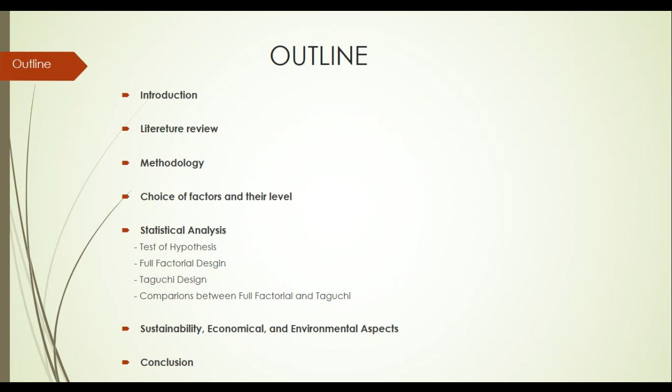I would like to go through the outline of the presentation. I will introduce the topic, quickly touch on the literature we reviewed to see the background of the problem, and share our methodology to tackle the assumptions we had. We will also discuss the factors we landed on and their levels, and explain the statistical analysis we used to come up with the conclusions of our research. We will touch quickly on the sustainability, economical and environmental aspects of the suggested process, and by the end we will conclude with some conclusions from this research.

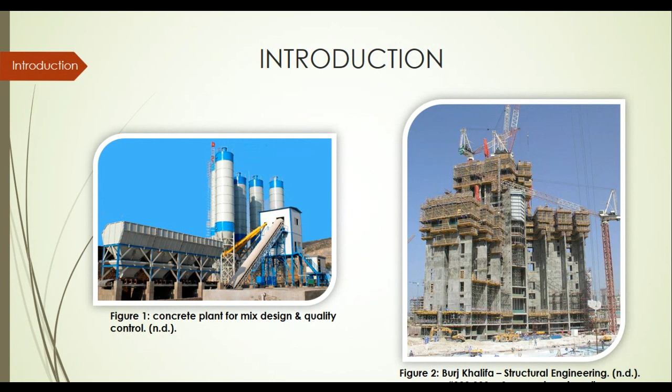In general, concrete and construction industry is a viable and advancing industry, especially here in the United Arab Emirates, where a lot of construction is moving on. As an example, Burj Khalifa Tower has consumed almost more than 330,000 cubic meters of concrete volume. So basically, the concrete and construction industry requires a lot of attention and improvements to save the environment and reduce the cost as well.

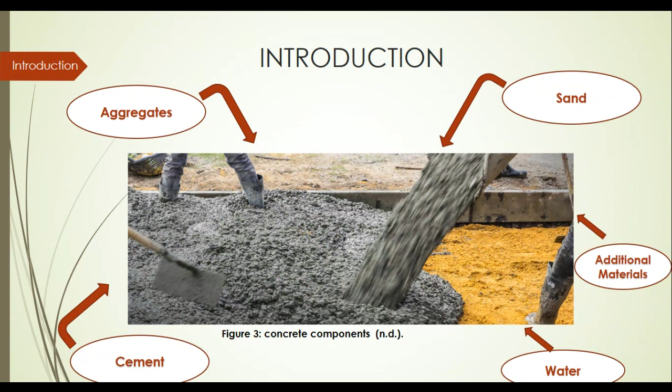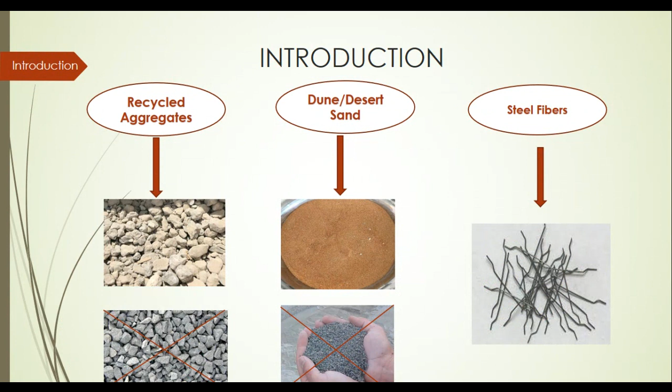In general, concrete is made of aggregates, cement, sand, water, and some additional materials to give the concrete certain properties. What we are suggesting here, and would like to improve in the concrete mixing process, is to add recycled aggregates as well as dune, which is desert sand that's available for free here in the country. We would also like to examine and test the addition of steel fibers in the concrete mixing.

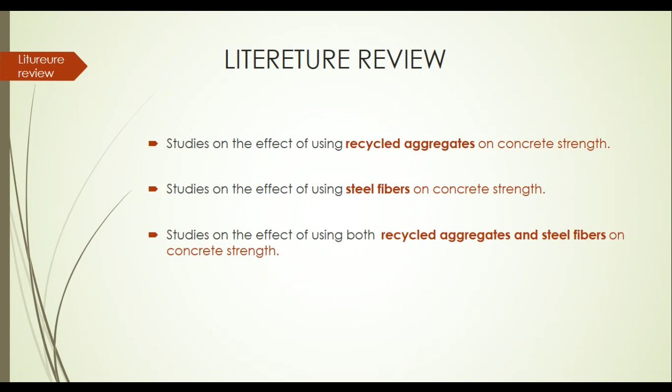Before we get into the experimentation, we did a literature review on the topic to see what has been done regarding adding recycled aggregates and regarding adding steel fibers. But honestly, the dune sand or desert sand is something we are suggesting here in the paper, so not much literature was found on addition of the sand.

Just going through the literature review regarding the recycled aggregate and its effect on strength: here we have a couple of research studies that verified and tested the addition of recycled aggregates. For example, Cakir et al. in 2012 found that 100% of recycled aggregate decreased the compressive strength by 24% of the compressive stress of the samples.

Yehia et al. 2015 concluded that 30% of recycled aggregate will not do much change to the compressive strength. Zhou and Chen, 2017, said any percentage more than 50% will start to dramatically affect the strength of the concrete. So in general, we can conclude that the addition of recycled aggregate has a bad impact on the strength of the concrete.

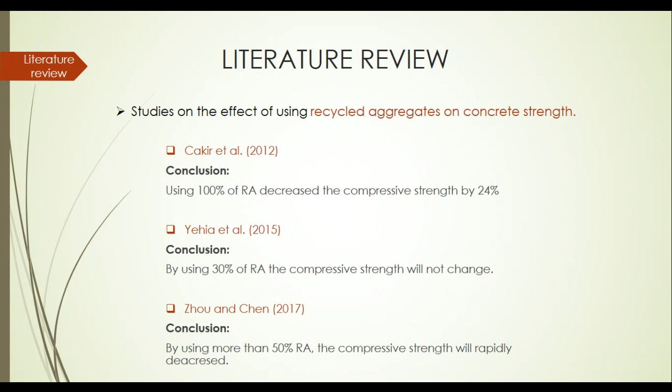The effect of steel fibers on concrete strength was studied by a couple of researchers. Thomas and Ramawamy, 2007, concluded that a percentage of 1.5 of steel fiber increased the compressive strength by 10%, which is a good addition. Altun et al. also found that adding 1% of steel fiber increased the compressive strength by 8%.

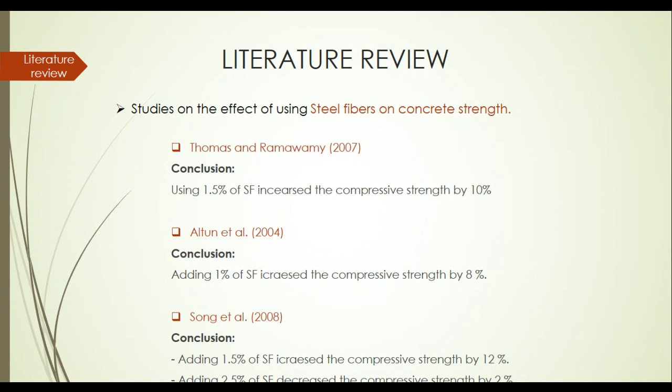On the other side, Song et al. 2008 found that adding 1.5 of steel fiber increased the compressive strength by 12%, while if you increase the percentage to 2.5, the compressive strength will decrease instead of increasing. So there is an optimum value that needs to be added.

We also have a couple of studies regarding the addition of steel fiber and recycled aggregate together at the same time. Gao et al. and others concluded that using steel fibers with recycled aggregate increases the compressive strength of the concrete in general.

So basically, what we are suggesting here is to study the effect of recycled aggregate, the percentage of steel fibers, and the replacement of the normal or manufactured sand with dune sand or desert sand, which is available for free.

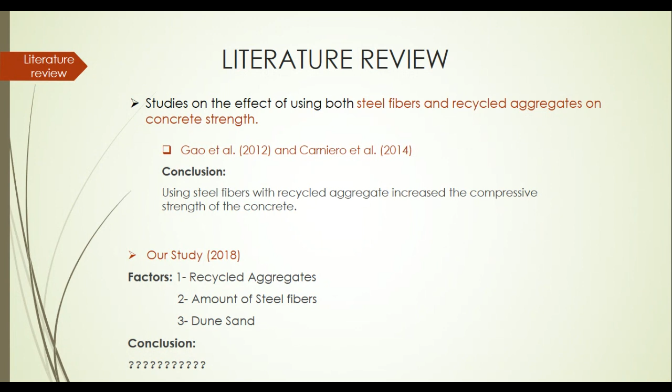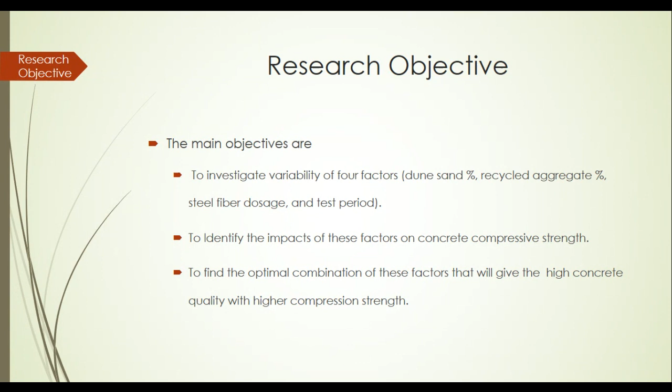Our main research objectives are to investigate the variability of the factors, the optimal percentage and optimal level of each of these four factors to get the optimal compressive strength. We also want to identify the impacts of these factors on concrete compressive strength, and find the optimal combination of these factors if they have a mutual effect on each other, and ultimately how these factors affect the quality and compressive strength of the concrete.

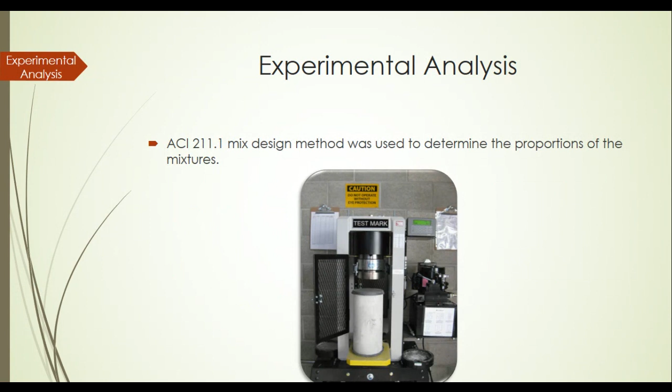Toward this end, we followed an experimental approach, the ACI 211.1 mix design method, which was used to determine the proportion of the mixture as well as the mixing and testing procedure. Referring to the literature and practice, we identified four factors: recycled aggregate, dune sand, percentage of steel fiber, and the duration from the day of casting till the day of testing. We came up with 3 levels for each factor.

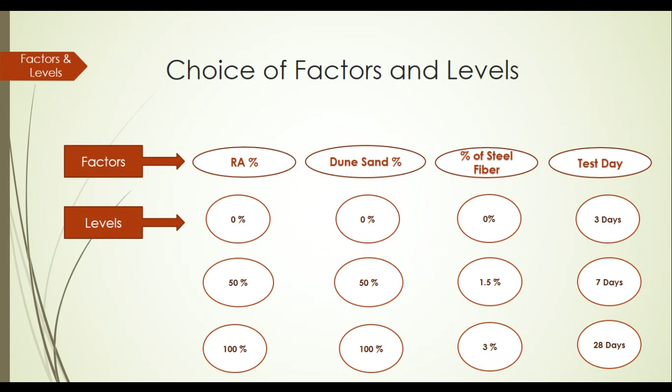These levels are selected based on suggestions in the literature as well as experience. For example, for recycled aggregate we have 0%, 50%, and fully 100% recycled aggregate, and the same approach for the other factors.

The response variable that we are measuring here is the compressive strength, because the main property that is watched for concrete in construction is its ability to take compressive load. So the compressive strength is our response variable.

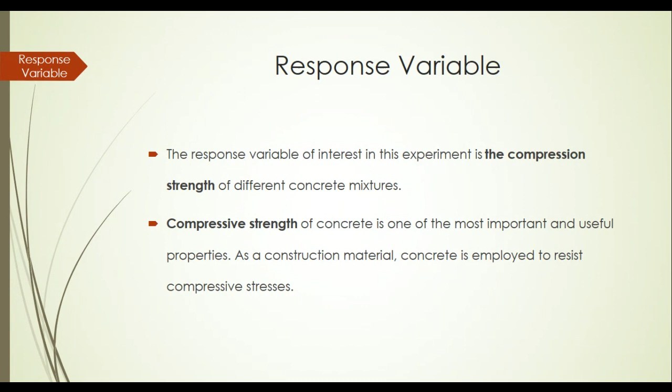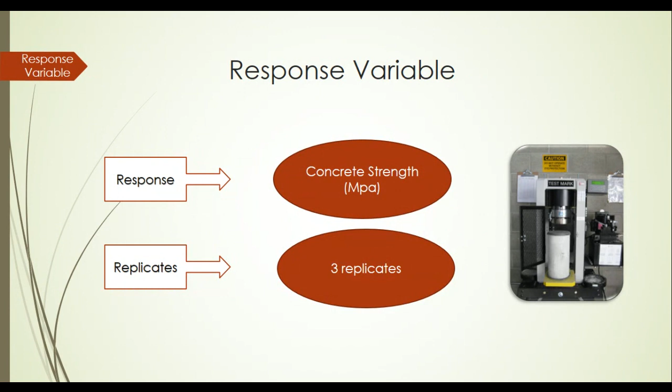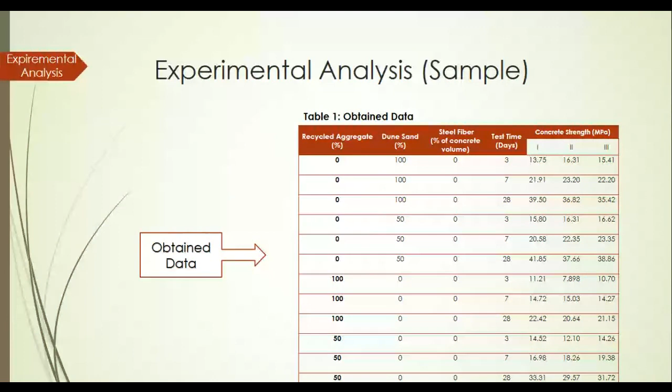To avoid or eliminate error in experimentation, 3 replicates were made and measured for each experiment in our design. For example, at zero recycled aggregate, 100% dune sand, 0 steel fiber, and 3 day tests, we have 3 replicates of these experiments. The first gives us 13.7 megapascal as compression strength, then 16, then 15, and the value we build our analysis on is the average of these 3 replicates.

What kind of statistical analysis did we use here? Since our objective is to investigate and prove that Taguchi design would work fine in this case, we have to compare it with a standard statistical test, which is the full factorial design. For this experiment with 4 variables and 3 levels, we need almost 81 experiments.

We conducted these experiments in a factory where one of the research team is working, and got the data required from these experiments. At the same time we also ran a Taguchi design, and Taguchi experiments need almost 27. We ran these experiments and collected the data to use for comparison between the full factorial design and Taguchi design.

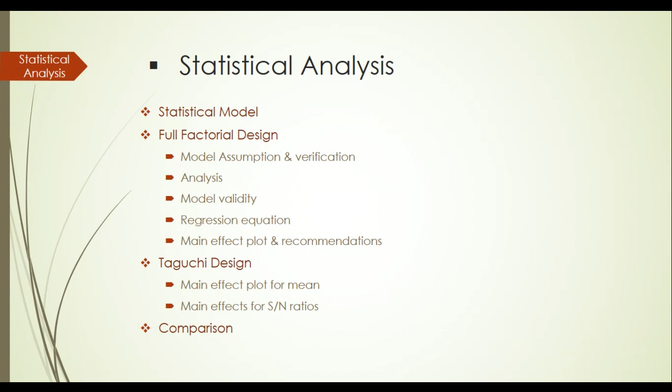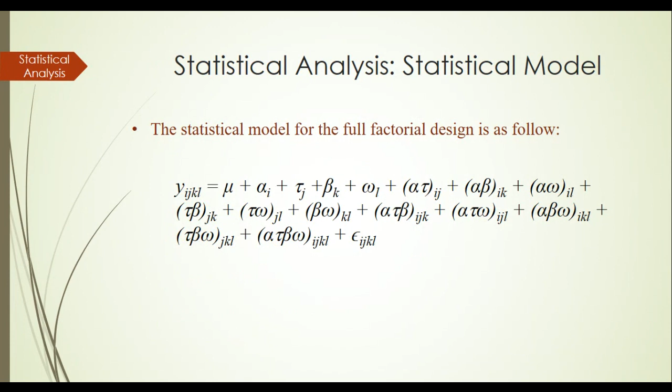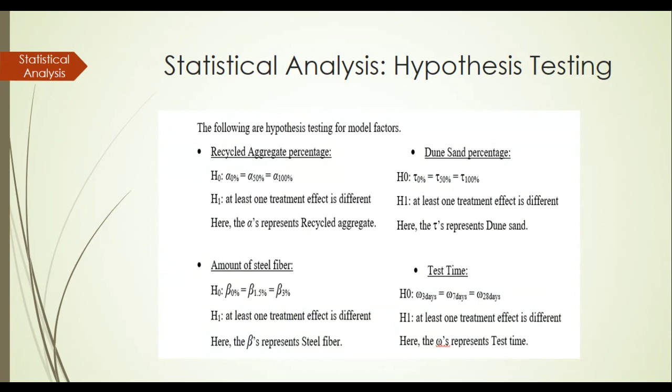We then conducted a comparison between these two techniques. Minitab was used to analyze the data, and a general regression model was generated. Tests of hypotheses were then used to test the effect of each factor level, whether there is a difference or not, and so forth.

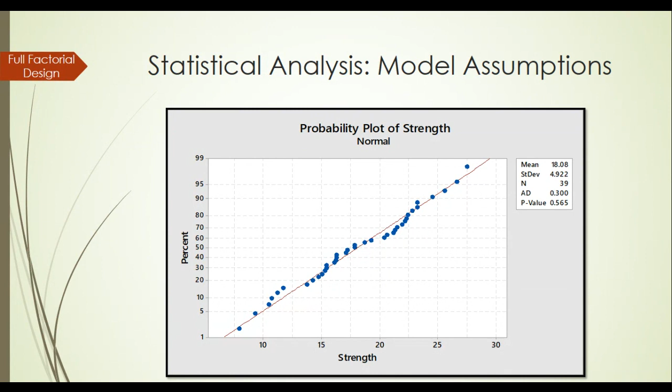The model assumption was verified through normality tests, and it seems to follow a normal distribution. This analysis is shown by Minitab before optimization, where the effect of single factors, two-way factors, three-way factors, and four-way factors is considered, and the p-values of each are calculated.

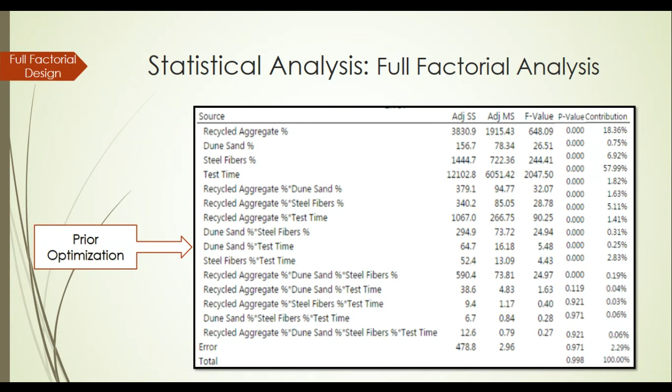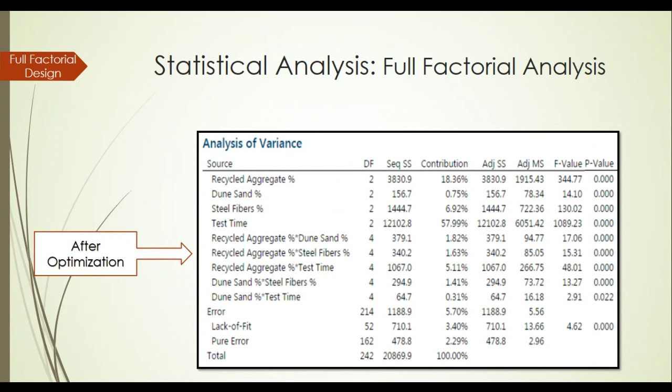After optimization, based on the p-values, it was found that only one-way factors and two-way factors were the most influential. Using Minitab's available tools, we conducted model assumption verifications like normality tests and other tests to validate the assumptions of normality we had made.

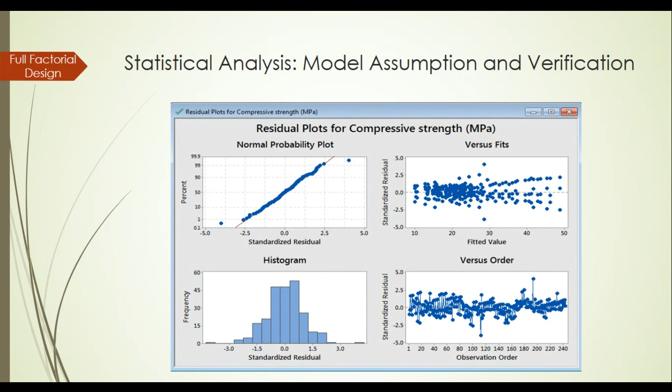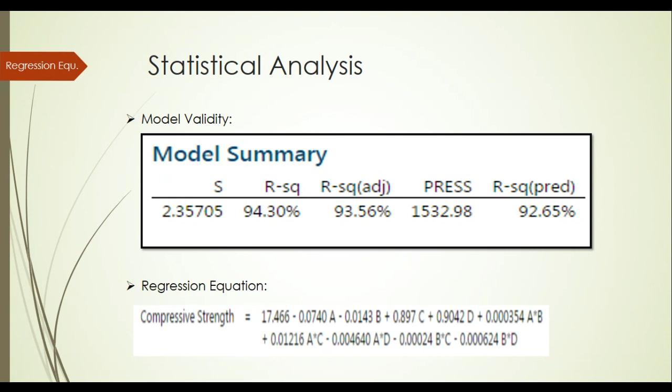The final model under the full factorial design ended up with A representing recycled aggregate, B the dune sand, C the fiber content or percentage, and D the testing time. Here is the final model based on the full factorial design. As we see, the R-squared value is high, 94.3%, which is very good.

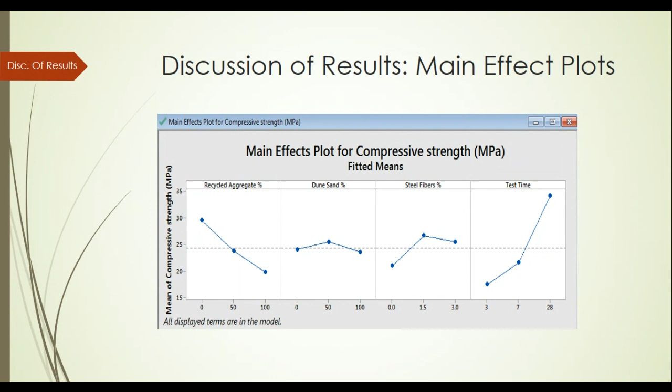For dune sand, the full factorial shows that 50% gives a better compressive strength, while for steel fiber addition there appears to be an optimal value around 1.5%. For testing time, at 3 days, 7 days, and 28 days, it's obvious that giving concrete longer time to cure gives better results. As per the test, 28 days is recommended, as it seems to be the time required for concrete to acquire its full strength.

Based on that, the selection would be, for example, here 50% recycled aggregate, 100% dune sand, and 1.5 steel fiber. It will give you a compressive strength of 35 megapascal as a compression test.

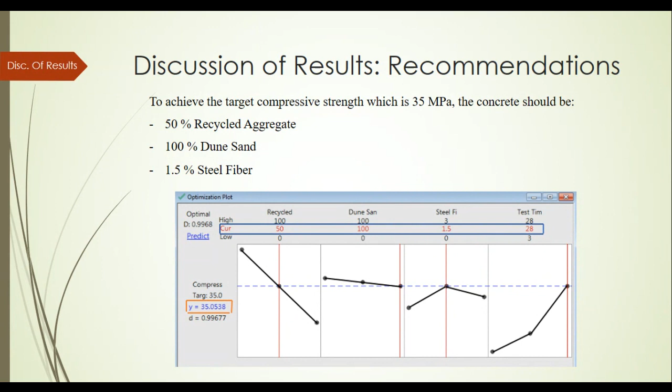So these are the results that came out from the full factorial. We would like to test the Taguchi design, the Taguchi analysis, and the motivation towards Taguchi is the reduced number of 81 experiments in factorial analysis down to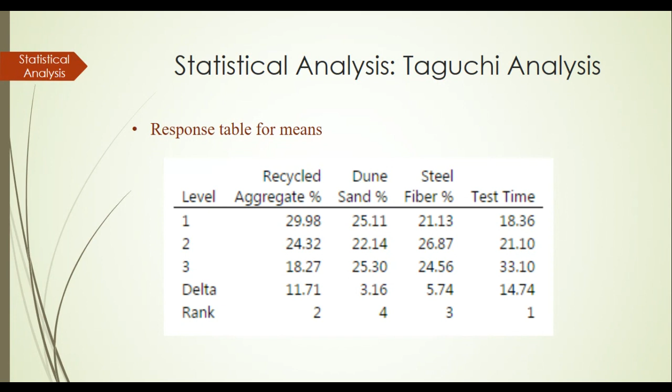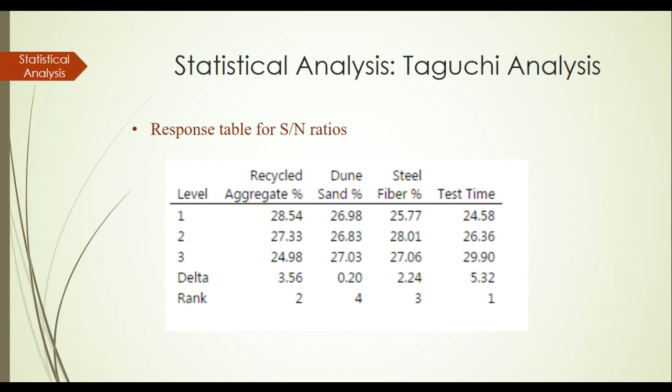Also here we have collected data regarding the signal to noise ratio, to sense or measure or assess the sensitivity to variability in the factors. So both are documented here.

And if we give a close look at the effect of the factors and the mean of the strength, we see results very similar to what we have seen in the factorial analysis. This shows clearly that the lower percentage of recycled aggregates is better. Dune sand percentage may be a little bit different here: 50% shows worse than 0%, while 100% of dune sand gives a good increase in the strength.

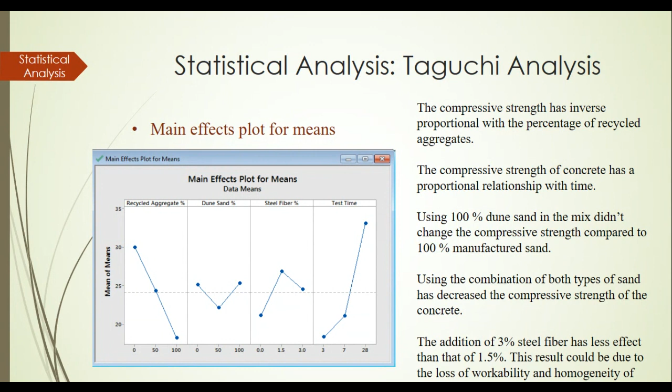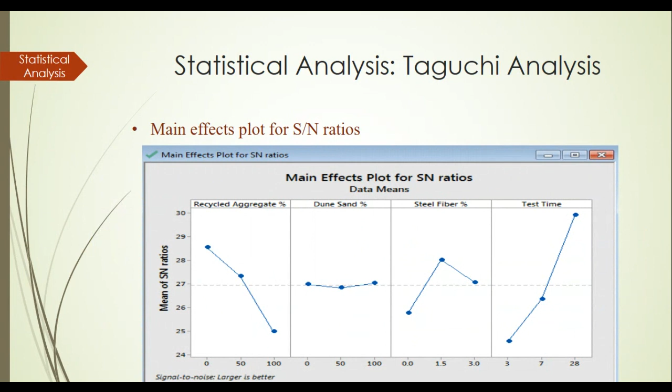The steel fiber also behaves the same; it sounds there's an optimal here, as well as for the curing time till the test time, 28 days was showing the best among all. Similarly, for the sensitivity, the signal to noise ratio follows almost the same pattern as the effect on mean.

So if we would like to conduct a comparison between full factorial results and Taguchi results, for the recycled aggregates we see almost the same recommendation, almost the same behavior. For the dune sand, except for the 50% value, the other results are very comparable. The steel fiber percentage is exactly the same recommendation, same as for the curing time.

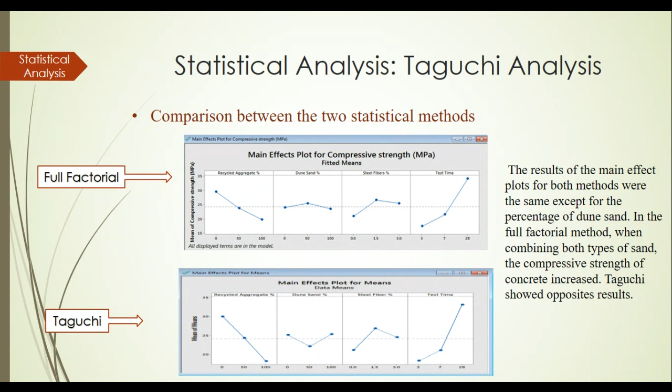From this comparison, we can confidently say that Taguchi design would be a good replacement for full factorial. It will lead to the same conclusions, give the same results, at a lower cost of experimentation. Almost 1/3 of the number of experiments needed to come up with the same conclusions. We can get it with the Taguchi design at a lower cost of experimentation.

Here we would like to shed light on the usefulness and sustainability of our suggestions of adding recycled aggregates, dune sand, and steel fibers. Definitely, the concrete uses non-renewable materials. Yes, it is abundant material, but still it's not renewable. So if we can use the recycled aggregate, that will first of all save the environment, also save the pollution that comes out from demolishing processes around the world. So basically, it's saving cost as well as saving the environment.

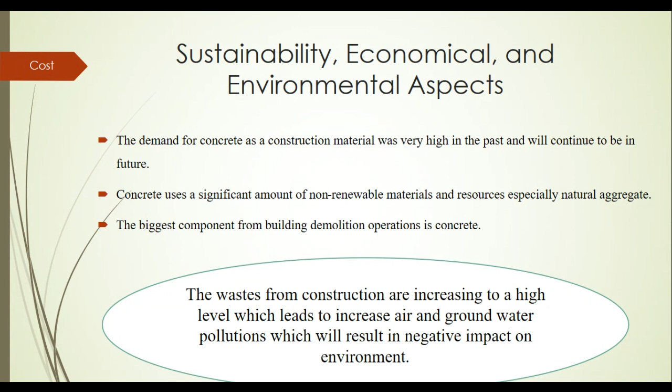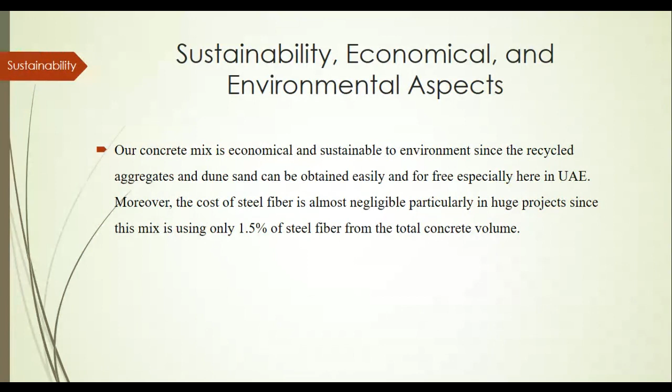Basically here our concrete mix is economical and sustainable for the environment, since the recycled aggregate and the dune sand can be obtained easily and for free, especially here in the United Arab Emirates. The desert sand or dune sand is available with a very minimal cost, mainly just the transportation cost.

So in conclusion, we can say we are able to come up with a new mixture that gives good compressive strength, and we were able to identify the optimal values of these 4 factors. Our conclusions are to use 50% recycled aggregate compared to non-recycled, to use 100% dune sand instead of manufactured sand, and to add 1.5% steel fibers, keeping the mixture till 28 days where it gives the optimal value.

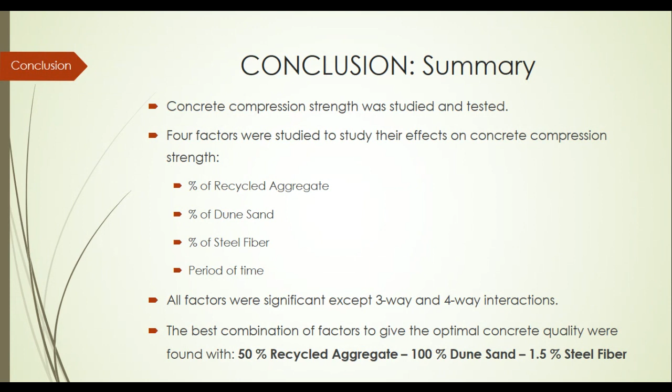Basically, once you cast it, it stays forever, so definitely it will pass the 28 days and get the maximum strength. So these are the 3 factors and the 3 constituents of the new mixture that we are suggesting, along with their values.

It's a promising step toward implementing recyclable material. So we can keep the good compressive strength while improving the utilization of recycled aggregates and demolishing outputs.

So as future work, we are suggesting the additional investigation of the tensile strength. On the other side, we have touched on the compressive strength, but we didn't test the tensile strength. Maybe the addition of steel fiber will improve this property.

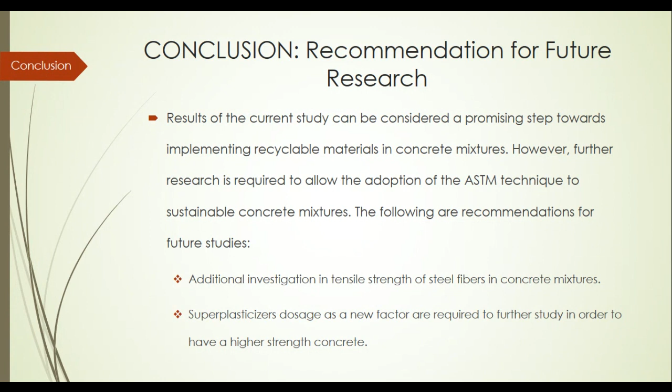Also, the addition of other additives to improve the quality and strength of the concrete, that will also add to the conclusions here and result in a mixture or concrete comparable to one that uses virgin aggregates and manufactured sand.